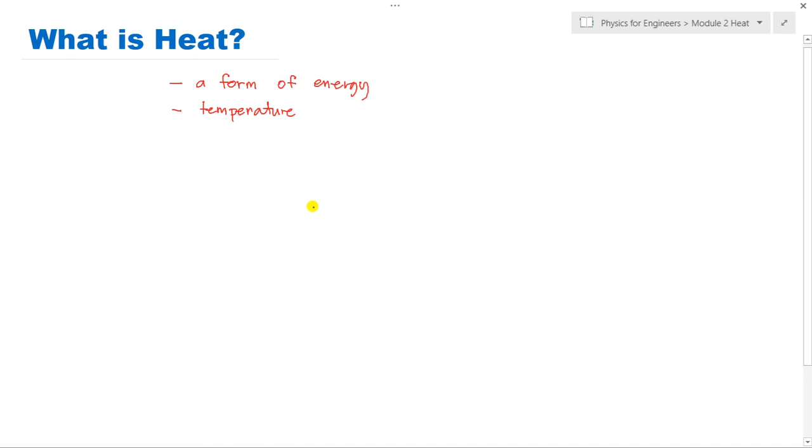And again, the common example of the transformation of heat is our steam engine. So let's say we have here a steam power plant. So this is a concept that is applicable in our field. So let's say this is our boiler. So this is a pressure vessel, pressure device, and then the boiler is filled with water. So water, H2O, and then we heat this water. So we have here a fire or a source of heat.

Okay, we heat this, and of course the chemical energy, since we are burning something. Let's say we have here a diesel fuel, wood or bagasse. So we have here a chemical energy possessed by the burning fuel, then converted into heat, and then this heat will transfer. So the transfer is here, transfer to our water. So that's why our water here will be heated up until it will change into steam.

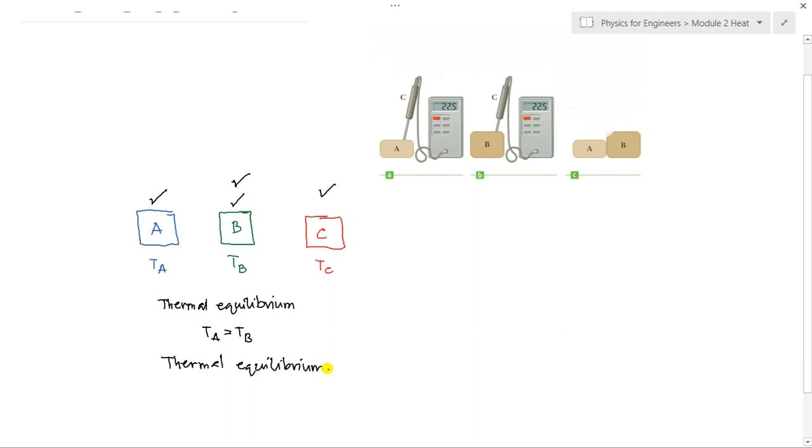And another thing, if material B and material C come into contact and achieve thermal equilibrium, meaning their temperatures approach a certain value, meaning their temperatures are equal, then we can also say that TB, the temperature of B, is also equal to the temperature of C.

Now from these two equations, temperature of A equals temperature of B, and if the temperature of B is also the same as material C, therefore by the zeroth law we can also say that A is also in thermal equilibrium with C, TA equals TC, because mathematically we can prove that TA is also equal to TC, and we can apply this in our thermometer.

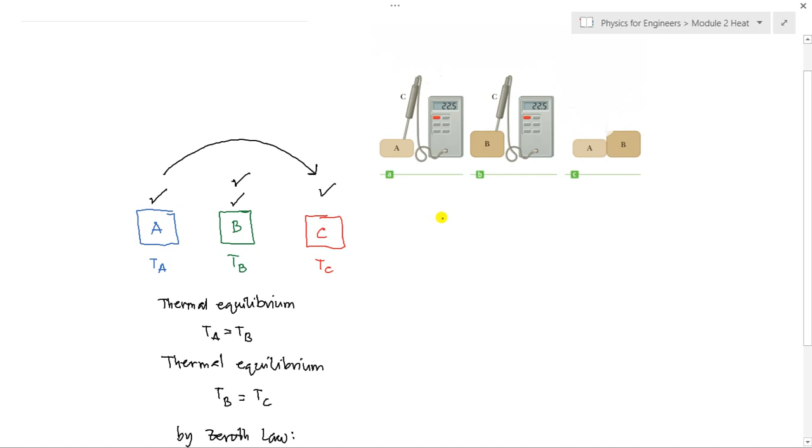So let's say it measured A, and the temperature reading of A is 22.5. So you can see we have a thermometer and material A, and the reading of material A is 22.5. The tip of the thermometer and the surface of material A have the same temperature, so it can be read; that is called thermal equilibrium.

Then the same thermometer measured a different material, material B, and it was found that the reading of material B is the same as material A, 22.5. Since they're using the same thermometer, we can say that A is also in thermal equilibrium with B, and the same with the probe of the thermometer, since they have the same reading.

So that's the zeroth law. If the temperature of A is equal to B, and B is equal to C, therefore A is also equal to the temperature of C, and the other way around. This is the definition of the zeroth law, and we can apply this by deriving the basic temperature scales. Okay, next, I'm going to jump to the temperature scale.

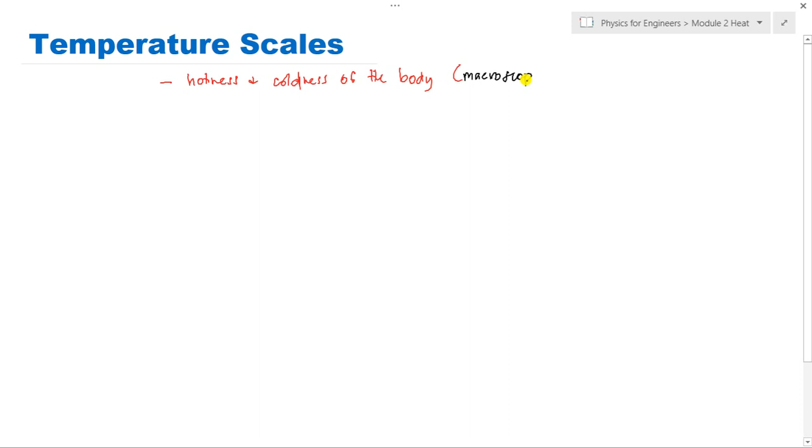We can also define temperature at a microscopic level, because another definition of temperature is the average kinetic energy of the molecules inside the body. Of course, because they interact, especially if there is input energy.

So let's say you strike it; consider these as molecules in a solid material with this arrangement. If we excite this one by striking it with an applied force, each molecule here will vibrate, and of course they will bombard each other, producing energy.

Because they rub against each other, there is friction and collision. So the totality of this creates heat, and then its average kinetic energy is measured in terms of its temperature.

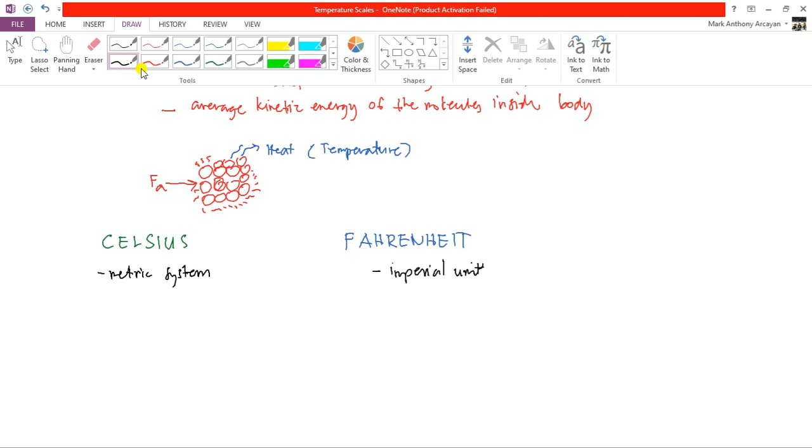And then for Fahrenheit we also have an equivalent scale, which is the Rankine. Okay, Rankine. So for Celsius we have Kelvin, and for Fahrenheit we have Rankine. So let's start with deriving the relationship that exists between Celsius and Fahrenheit.

For Celsius and Fahrenheit, we are going to base our derivation on the working substance, which is water, using the properties of water in terms of its temperature. We all know that at freezing, the temperature of water is 0 degrees Celsius, and in Fahrenheit it is 32 degrees Fahrenheit. So that's the condition at freezing.

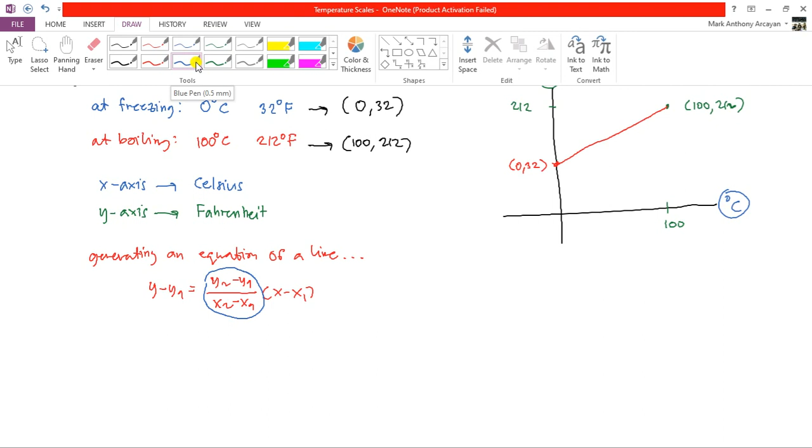So here, this one right here, can you notice, this is our slope, right? Diba? The slope is change in y over change in x. So here we can substitute the values. So y minus, let's say I'm going to pick this 0 and 32. So y sub 1 here is 32. So here we have 32, that is equal to, let's say our y sub 2 is the second point, this 100 and 212. So therefore y sub 2 is 212. This is for Fahrenheit.

Minus y sub 1 is 32, all over x sub 2 is 100 degrees Celsius minus 0, then multiplied by x minus, since we are choosing the first point as 0 and 32, so therefore the x here is 0. So 0 na siya. So simplifying, let's just change these x and y in terms of degrees Celsius and Fahrenheit. So y is for Fahrenheit, diba? Degree Fahrenheit minus 32 is equal to 180 over 100 multiplied by degrees Celsius.

So we can transpose this on the other side, so we now have degree Fahrenheit is equal to, this would be simplified into 18 over 10, that is 9 over 5 degrees Celsius plus 32. Okay, so this would be the relationship that exists between degree Celsius and Fahrenheit. Now if you're going to convert a certain temperature from degree Celsius to degree Fahrenheit, you can use this one, and of course you can also use this vice versa.

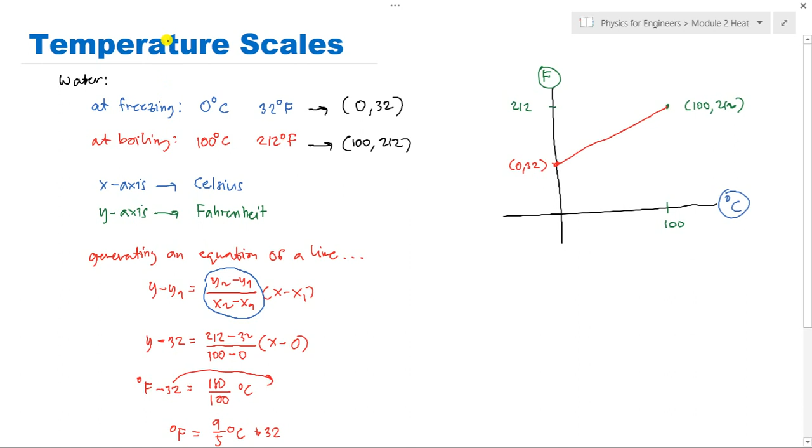Okay, and then modifying this equation, you can have degrees Celsius as a function of degree Fahrenheit. So common lang bahala sa pag-derive. So this is the relationship between degree Fahrenheit and degree Celsius. And now ato na po i-discuss ang relationship between katong ilang corresponding nga mga temperature scales. For degrees Celsius we have Kelvin, and for degrees Fahrenheit we have degree Rankine. So let's start with

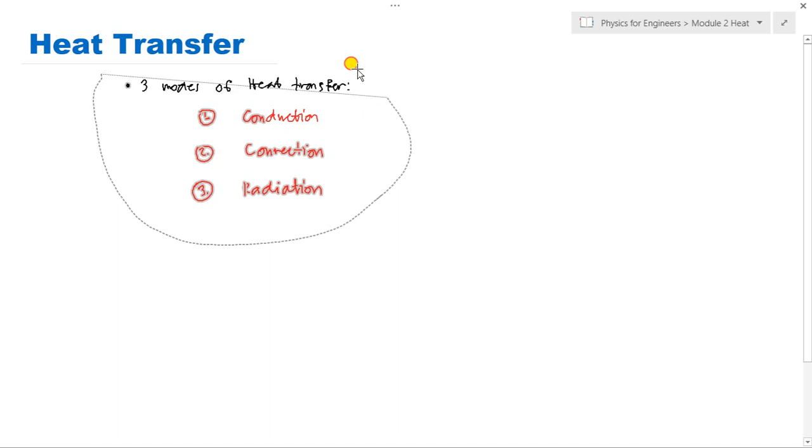So ato na siya tagsa-tagsaon, and here I am going to discuss the definition of these three modes of heat transfer, and also their formulas. Okay, importante ang mga formula because mag-solve man ta mga problems nga related ani. So let's start with conduction. Okay, mao na siya ang pinakauna, ang conduction.

Okay, so when we say conduction class, this is a heat transfer that exists among solids. Okay, this is for solid matter. Okay, solids. But however, in some cases class, we can also experience conduction heat transfer in fluids, like in liquids and gases, if given certain conditions. Let's say if the air is not moving, very still air, then we can assume that conduction is the mode of heat transfer only in that case.

But naturally, since the air around us is moving, it can no longer be called conduction. So the most common application of conduction is for solids, because conduction is the heat transfer that exists between molecules that bombard, okay, that vibrate each other.

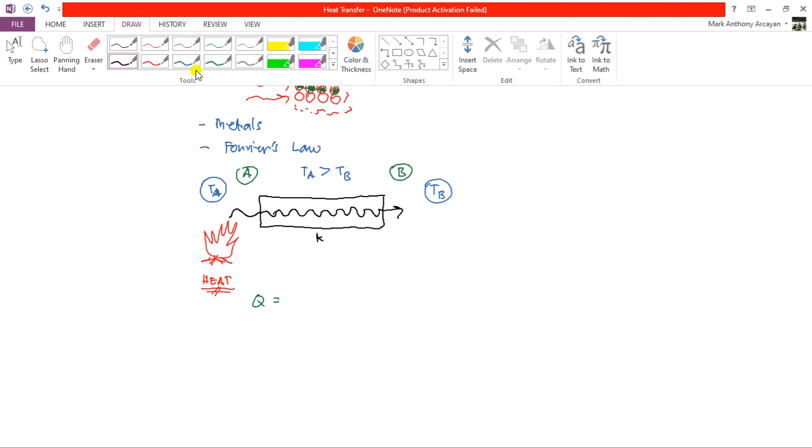Why? Because normally heat moves from higher temperature to lower temperature, so that's why there's a negative sign. Anyway, if the problem is just asking for the heat rate, you can just take the absolute value. So for Fourier's law, we have negative K.

Again, K is the thermal conductivity, and the rate of heat transfer is also proportional to the exposed area. The exposed area here is this side - can you see? This side has more exposed area. So we have area, and of course the last factor is that the rate of heat transfer is also related

to the length of the material. Of course, since this is conduction, it happens molecule to molecule. So the farther you are, the longer it takes to conduct.

As I gave you an example earlier about the bonfire, when you dip a steel rod into the bonfire - if the rod is long, it takes longer to feel the heat, whereas if it's short, it heats up faster. So there's a relationship that exists between the rate of heat transfer and the length.

So according to Fourier, the relationship is directly proportional to the thermal conductivity and the area, but inversely proportional to the length. So it's faster if the length is short - if the length is longer, it means it's slower.

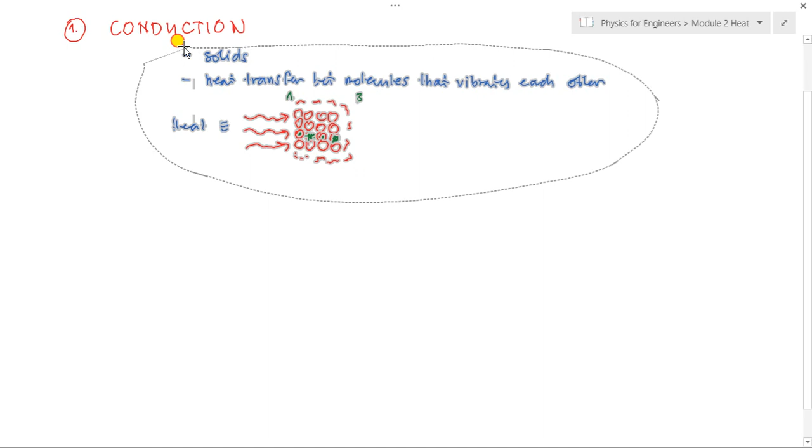Okay, so we also have some formulas we need to take regarding conduction. What if we can model our heat transfer into an electrical circuit?

As you notice, by Ohm's law, we know that the relationship is voltage V is equals to IR. So this is voltage, the driving force, and of course this is the current, the flow of charge, and we have here the resistance, which resists the flow of current. So the current is inversely proportional with the resistance. That's for Ohm's law.

But for Fourier's law, our law of conduction, we go back. So Fourier's law, we have Q is equals to negative KA over L delta T. Now, as you notice, the I from Ohm's law is the current, the flow of electrons or electrical charge. For Fourier's law on conduction, what flows? We can relate that current is the same as in Fourier's law, that is the heat rate, or the heat transfer rate.

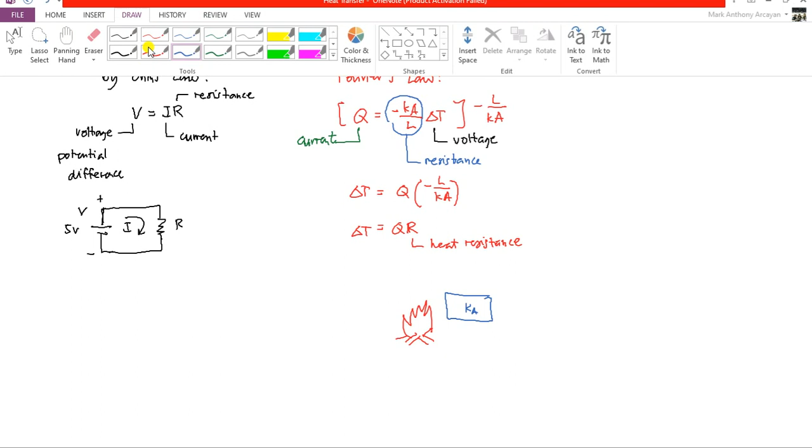And then we have some materials close to it. Let's say we have the first one, material A with thermal conductivity KA, and then next to material A, another material, material B, with thermal conductivity KB. And then we have a last material with conductivity KC.

We have here a composite material, and we assign temperatures. So we have T1 for this side, and T2 for this side. Assuming that T1 is greater than T2, so this side is hotter. We also have here an area, the heat transfer area, and since they are uniform, they have the same area but they have different lengths. Let's say this is length A, length B, and length C.

So they have different lengths, different thermal conductivity, but they are of the same area. Heat flows from the first material, from K A to K B and then to K C.

And then it goes out. So we will find the heat transfer rate from this side T1 until this side T2. Of course, the principle here can be applied from electrical circuits, those series or parallel circuits.

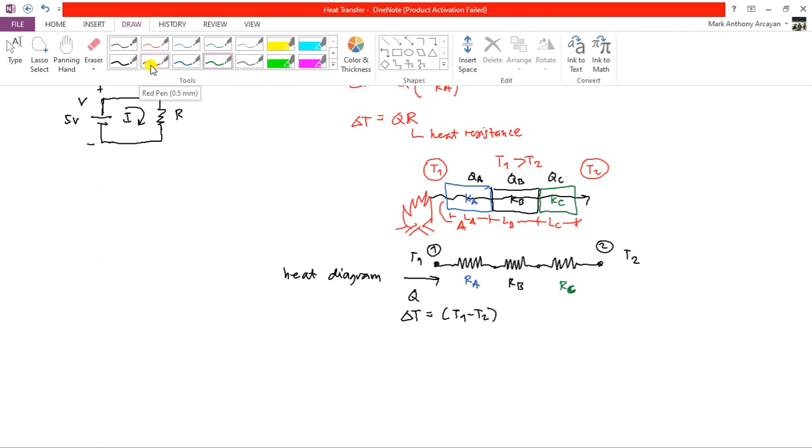How about for R? Since they are of different material, the first one is RA, the heat resistance for A, then RB, the heat resistance for B, and the last one is the heat resistance for C. So since this is series, we can generate the equation for current Q. We all know that current I equals V over R.

So what is the voltage again in our heat transfer area? That is the delta T, the temperature gradient. So we have voltage delta T all over the resistance. Since this is series, the total resistance is equal to R1 plus R2 plus R3.

Summing it up, that is RA plus RB plus RC. And as we all know, the formula for resistance is negative L over KA.

Since this one right here is negative, we can just ignore this, it stays the same, or just take the absolute value anyway, since nothing changes because it's unidirectional. So we now have negative, or we can keep the negative and just put it in the numerator.

So for RA we have the length LA over K A and then the area, plus for RB the heat resistance is the length of B over the thermal conductivity of B, then A, plus the length of C over the thermal conductivity of C and then the area. So this would be the rate of heat transfer for composite materials.

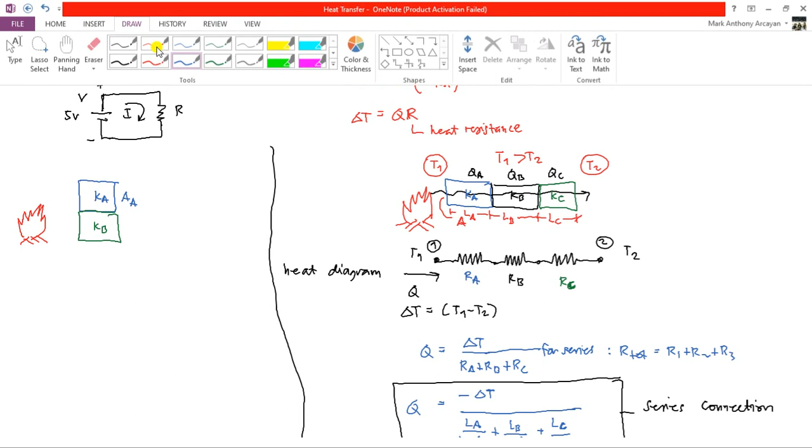How about for parallel? Let's say we have again a heat source, and then I have here the first material, and then the second material. Of course the first one is K A, and the other is K B. K A has an area, this is area A, and K B has a different area, that is area B. And let's say they have the same length.

And then of course on the left side there is temperature 1, hotter than the other side, temperature 2. So therefore heat will flow from here to there. And since the heat flows two ways from the heat source, it will be split. It splits since they're in parallel. So the heat from the source is divided, going to material A, and the other going to material B, then they join again. So therefore a parallel connection exists.

So if we're going to convert this into a heat diagram, it will now become: this first point is T1, and then it splits, so this is the resistance for material A, and another one is the resistance for material B, and then they come up with the same temperature. So this is T2. So here we have the resistances. This one is for material A, that is resistance A, and this one below is resistance B.

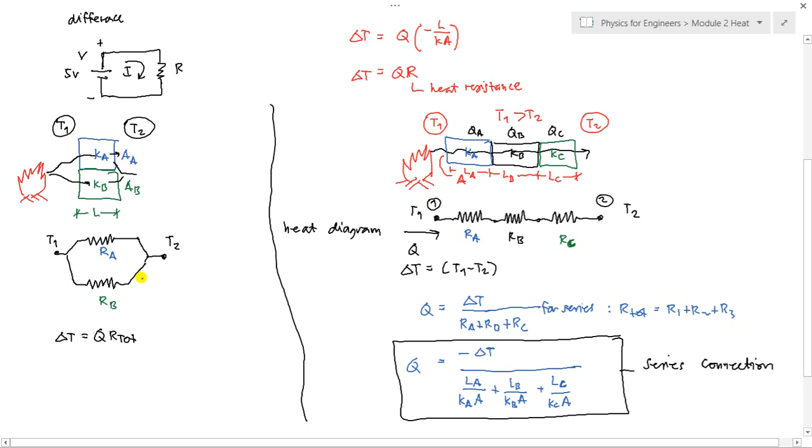So here we can use Ohm's law for heat. Our voltage is the temperature, so that is delta T. Voltage equals IR, where our current here is Q, and our resistance is the R total, in parallel. Since it's in parallel, what is the total resistance for a parallel connection? For a parallel connection, R total is equal to RA times RB all over RA plus RB.

Actually this is derived from the relationship 1 over R total equals 1 over RA plus 1 over RB. So here it's in parallel, so we're going to solve for Q. Therefore Q is equal to delta T all over R total, where delta T is T1 minus T2, all over RA RB all over RA plus RB.

Now substituting the parameters of materials A and B. For material A, the resistance formula is L over kA times area A, since the L is the same, multiplied by RB, that is L over kB area B, all over L over kA area A plus L over kB area B. Actually, we can cancel one of the L's here, so the final formula would be T1 minus T2 all over this one.

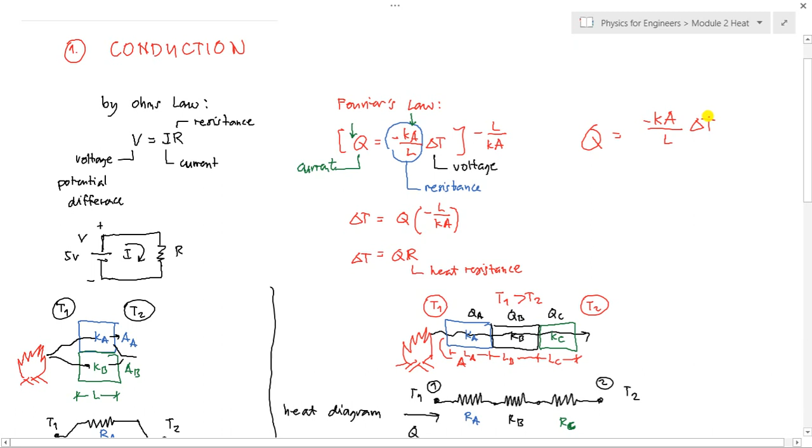So again, Q is equals to negative kA over L, so the length of the path of conduction, then change in temperature. Again, para maka-solve ta og problems nga composed of two or more materials arranged in certain arrangement, let's say parallel or series, then mao na siya ang mga formulas niya pag-derive niya. So dapat kabalo mo

interpret sa heat diagram. So ang pag-relate nimo ana is mura siya sa concept sa electrical circuits. So gamit ang Ohm's law, we're going to relate the voltage as the temperature difference, the current as the heat rate, and the resistance, which is the ratio of the length of the conductor and its thermal conductivity and the area. So this is for conduction. Now let's go to convection.

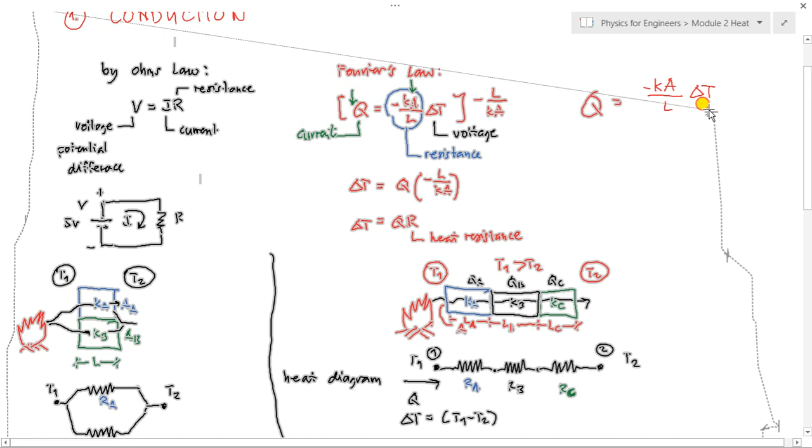So take note with this. So the second one is convection. Now for convection class, this is the transfer of heat mostly for fluids. So what are fluids? These are liquids and gases. So sa tubig o sa hangin, liquids and gases.

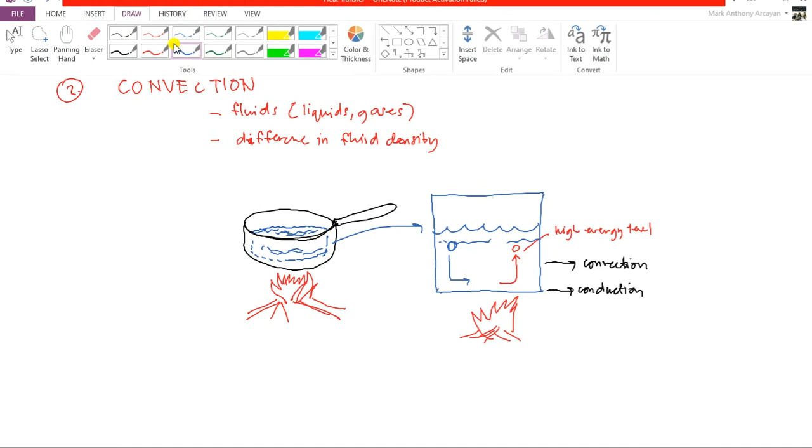Why? Because kani siyang high energy level nga mga molecules, this one is already less dense. Mas gaan siya. But this low energy level nga mga molecules, more dense ni siya, or mas denser ni siya. So therefore naay difference in fluid density, and by this mechanism, nagrotate siya. Nagrotate ang colder water kay mo sink, ang hotter water goes upward.

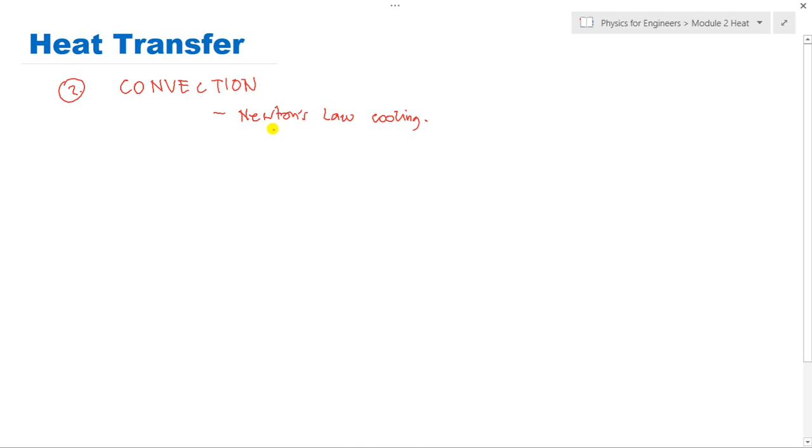So for convection, it follows Newton's law of cooling. So Newton's law ni siya. Ganiha, for conduction it follows Fourier's law. So for convection, Newton's law. Unsa na ang formula ani? So di ba, if we have here Newton's law of cooling, if we have here some water, so naay air nga gi-pass through.

Actually ang cooling effect niya according to Newton's law is we have here Q is equal to the convective heat transfer coefficient, HC, then the area. Okay? Directly proportional siya sa area. So kung mas dako ang surface sa tubig, dali gid ni siya ma-cool. Pero gamay ra gali. Okay? So that is Q equals HC A delta T.

That is kung saan pasot aning delta T. So at the surface of the water, kay surface phenomena na siya, that is T1, and then of course the environment T2. Now in analyzing convection class, be sure to indicate ang sa surface gid because this is a surface phenomena and convection. Say pasabot niya ni sir.

Let's say if we have here a wall, okay? We have here a wall and this is the surroundings. Of course, ang una mahitabuan ni heat transfer within the wall, this is conduction. However, at the point nga ang surface temperature sa wall, this is T1 and the temperature at the surrounding T2. Okay? Ang mahitabo nga heat transfer from the surface of the wall to the surrounding, exposed in the surrounding, is already convection.

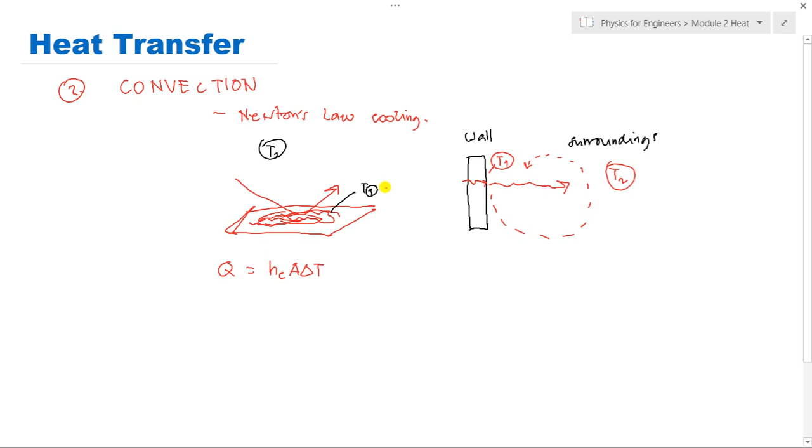So again, walay mahitabo nga convection sulod sa wall because purely conduction na siya since this is solid. But in this case, since outside sa wall kay fluid naman siya, so therefore convection na siya. So again, take note that the delta T here is the temperature of the outside condition, that is surrounding, and then the surface temperature of a certain material nga subject sa atong analysis.

So here we can also use for composite fluids. Okay? For composite fluids, let's say ang fluid nga gi-stack in series or in parallel. So let's say fluids at different densities. Fluid A, fluid B, fluid C. Of course, naa na siya'y corresponding HC: heat transfer coefficient for A, for B, for C. Actually, the same as what we did. Let's say this is T1 and then T2. Let's say nag-init ta. Ato siya heat up. Of course, magbukal-bukal ni siya.

So ang overall convective heat transfer ani, medyo complicated man ning heat convection, mao nang gi-HC lang siya. Unlike conduction na ang resistance niya in terms of the length and the thermal conductivity, here inversely ra siya proportional to the heat transfer coefficient. So that's why you can still use the principle for electrical circuit. This is T1 then T2, but this time this is RA, the resistance for fluid A, the resistance for fluid B, and the resistance for fluid C.

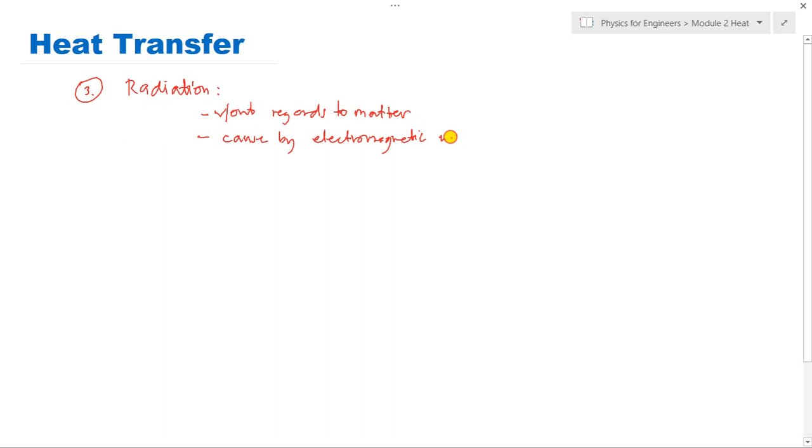So the last one is the radiation. This is the transfer of heat energy that does not depend on matter, without regards to matter, meaning bisag wala pa'y hangin. Ang manifestation sa radiation is due to electromagnetic waves. Of course, kaning electromagnetic waves nag-carry ni siya og electromagnetic energy.

Let's say, ang good example is ang atong sun. Atong sun, and then layo kaayo ang earth. How come nga ang energy gikan sa sun maka-reach sa earth? In fact, ang medium nga nag-exist between the earth and the sun is a perfect vacuum. This is space. Walay hangin, wala po'y conduction tungod kay walay rod nga nag-connect sa sun ug sa earth. So walay matter. That's why radiation takes place.

So for radiation, these are electromagnetic waves. Since this is a source of heat, the sun is composed of hydrogen and helium. Kana nga mga elements, mag-emit na siya og electromagnetic waves every second.

So the sun radiates heat towards the earth, and we feel the heat. And of course, since this is heat transfer by radiation, there must be a temperature difference. Whether it's radiation, convection, or conduction, if there's no temperature difference, there's no heat transfer. That's why the sun is hotter than the earth, so the flow of radiation is from the sun towards the earth. So radiation is caused by electromagnetic waves moving from a hotter body to a colder body.

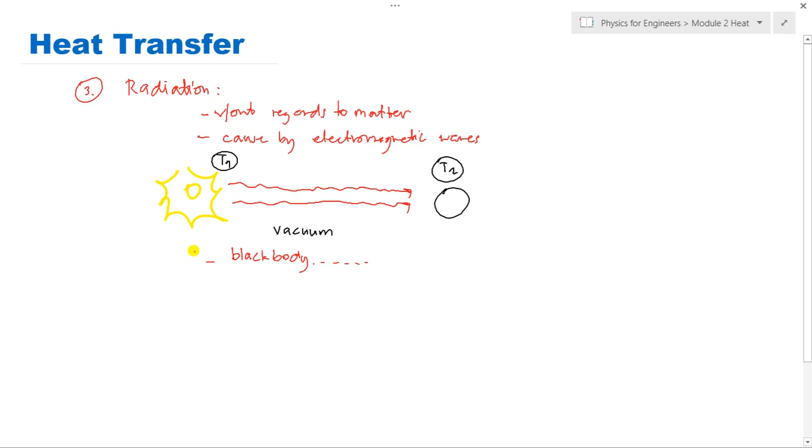And also in radiation class, there are principles that apply. The first one is the black body. Not only does the sun radiate energy, all bodies do. As long as an object's temperature is not 0 Kelvin, all objects in our surroundings above absolute zero radiate. So every second, all of us emit radiant energy.

Let's say we have an object A, another object B, and another object C, all inside a room. Object A emits radiation, object B also emits radiation, and object C also emits. Of course they don't just emit, A also accepts radiation. So A accepts radiant energy coming from outside sources, and same with C. That's why energy is conserved here, some goes out from them, some comes into them. So they interact with each other.

For a black body, if a material absorbs 100% or emits 100% of radiant energy, it's considered a black body. Of course, in reality nothing can reach being a true black body since it's more of an ideal concept, so we only have near black bodies. Let's say its emissivity - we call this parameter emissivity in a black body - we denote that as E. The emissivity for objects around us is about 0.9 or 0.95.

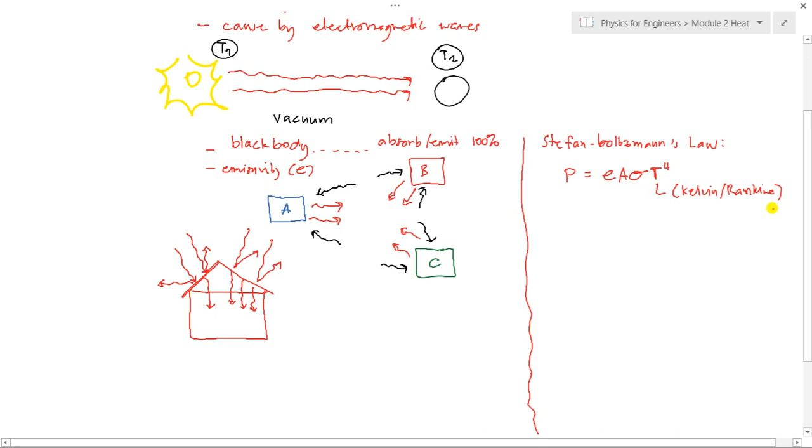For Stefan-Boltzmann's law, the amount of energy being emitted by a certain object is equal to P, where P equals the emissivity E, times the area - the more area, the more it emits - times the Stefan-Boltzmann constant, denoted sigma, times T raised to the power of 4. The temperature for Stefan-Boltzmann's law must be in absolute terms, meaning either Kelvin or Rankine. Take note, if it's in Celsius or Fahrenheit, that would be wrong.

Now, in order to determine the net rate of heat transfer, since we're dealing with heat transfer, let's consider two objects or two entities. Let's say we have object A and its surroundings, which I'll label as entity B. Of course, A radiates heat.

Of course, the surroundings B also radiate to A, and B follows the same formula, EA sigma T to the 4th. So surface A has a temperature TA, and the surroundings B also has a temperature TB. If A is hotter than its surroundings, then heat transfer happens.

The net rate of heat transfer is represented by Q, which is equal to the difference of the amount of energy emitted by each object, that is emissivity times area times sigma times T to the 4th. For A, that is E, area of A, sigma, TA to the 4th minus E. Since this is a surface phenomenon, the sigma is the same for all materials, then T to the 4th with letter B. So simplifying, we have EA sigma times TA to the 4th minus TB to the 4th.

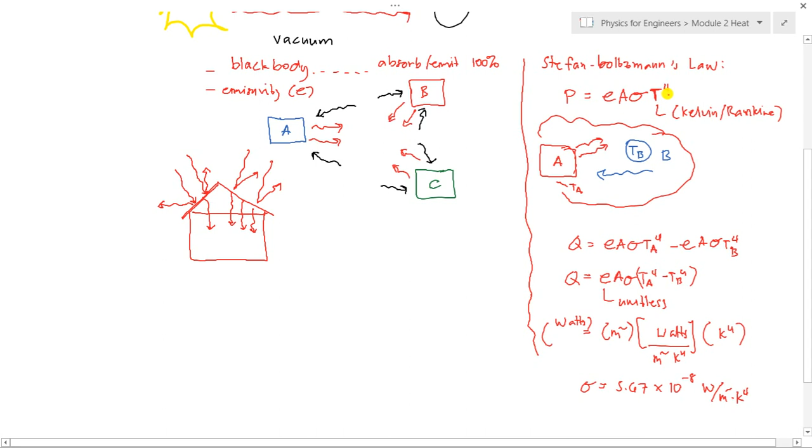What is the value of the Stefan-Boltzmann constant? Actually it's in the calculator, but you can memorize that it is 5.67 times 10 raised to the power of negative 8 watts per meter squared Kelvin to the fourth. That's the formula for radiation, which is emissivity times the area times the Stefan-Boltzmann constant sigma, then to the fourth power of its temperature. This equation comes from the Stefan-Boltzmann's law.

So just a review, again for conduction, it comes from Fourier's law. Convection comes from Newton's law of Cooling, Q is equal to hc times A times delta T. And radiation is Stefan-Boltzmann's law, P is equal to, actually this is EA sigma T to the fourth. That's the formula for heat transfer.

So let's try some sample problems. This is a problem for conduction. It states that an owner of a house designed one of its walls 2 meters high and 2.45 meters long with 3 layers comprising of 0.2 meter concrete. First is concrete, followed by 0.5 inch sheeting, which has a lot of insulation, then 3.5 inch fiberglass batting and 0.5 inch drywall.

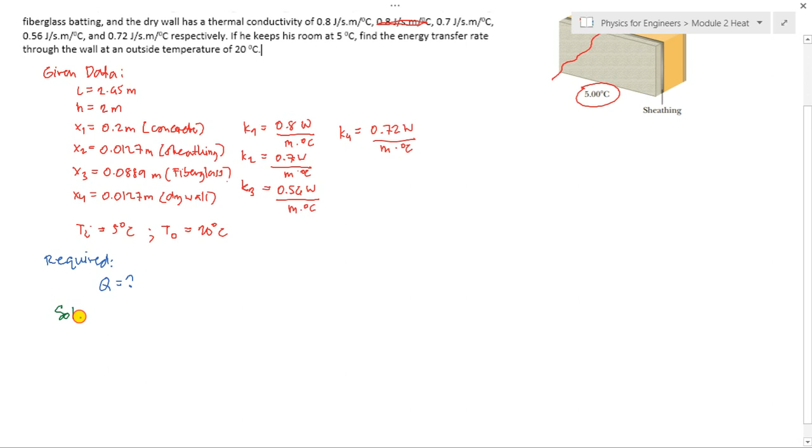Solution. Now this is conduction for composite materials, so we're going to draw first its equivalent heat diagram.

So from the inside, that is Ti, then there's a resistance. This is for the concrete, that is R1, because 1 represents concrete, followed by the sheeting, that is the resistance for sheeting. Next is the resistance for fiberglass. The last one is the resistance for drywall, R4. Then finally to the outside, that is To.

So here we can say that the total resistance, R total, is equal to R1 plus R2 plus R3 plus R4. And we know that in terms of the given data, that is equal to x all over k times the area. So solution,

from the heat diagram we can say that Q is equal to, since this is like current, delta T over R, that is delta T all over R total. And we know the delta T, so let's start with Ti.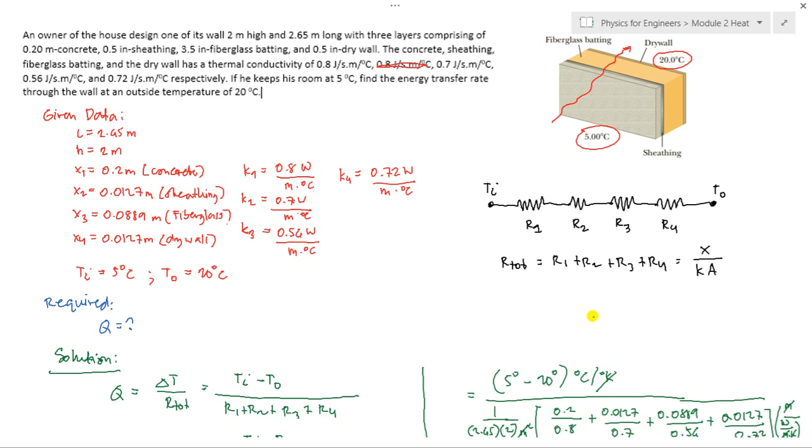Why? Because of course if you see, the higher temperature, normally heat flows from higher temperature to low temperature. That's why Fourier put a negative on K in the general formula. That's why let's just take the absolute here. That is 178.84 watts, to the inside. Okay, so this is our final answer.

Let's proceed for convection. So here, a room is to be maintained at 20 degrees Celsius during the winter season with outside condition of 1 degree Celsius. The convection heat transfer coefficients in the inside and outside are 0.5 watts per meter squared degree Celsius and 0.87 watts per meter squared degree Celsius. The total surface area of the walls of the room is 100 square meters, and its thickness and thermal conductivity are 0.7 meters and 0.8 watts per meter per degree respectively. Find the heat rate transfer from the room towards the outside environment.

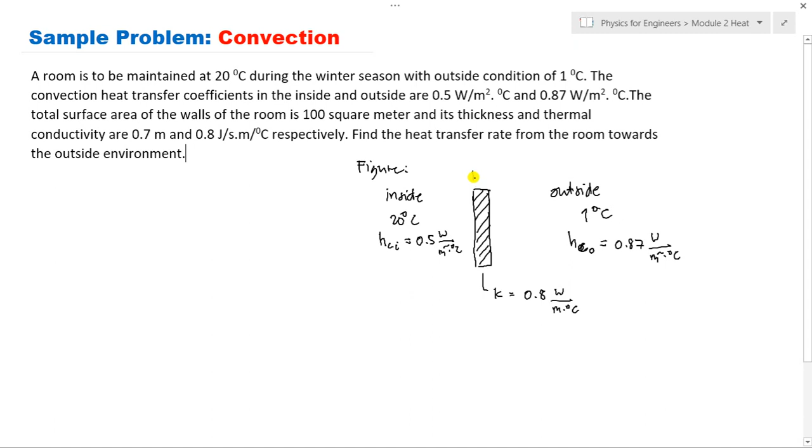Let's say HCI, that is for the inside, is 0.5 watts per meter squared degree Celsius. And then HCO is equal to 0.87 watts per meter squared degree Celsius. So those are the heat transfer coefficients. And of course, we also have K here, thermal conductivity, that is 0.8 watts per meter degree Celsius. And this is the thickness, 0.7 meters, the thickness of the wall.

And of course, it has a total area of 100 square meters. So basically, since the inside is much hotter than the outside, the direction of heat transfer is from the inside towards the outside. And we're going to solve for this Q. So here we can have first the heat diagram. This is a combination of convection and conduction.

Why? Because from the inside, Ti, convection happens first before conduction. So therefore, we have here the resistance for convection at the inside, Ri. Next, conduction in the wall, that is Rw, resistance of the wall. And lastly, the convection heat transfer at the outside, Ro, before reaching To. So here, we have a total resistance equal to Ri plus Rw plus Ro. Okay, so we take the resistance formulas, which were actually derived. If you already know the principle, then it will be easier for you.

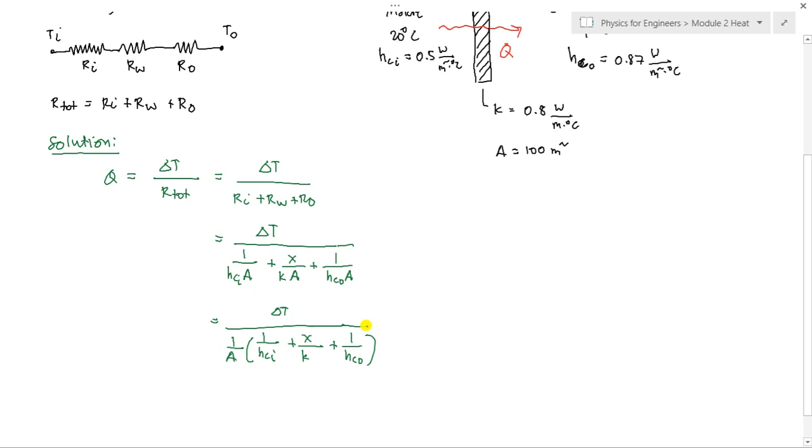So, substitute the values. Delta T, that is 20 minus 1, so 19 degrees Celsius or Kelvin. Then 1 over the area, 100 square meters. Then 1 over HCI is 0.5, plus X of 0.7 over 0.8, plus 1 over the heat transfer coefficient in the outside, 0.87. And the unit is meter squared degree Celsius over watts. Therefore these cancel, and what's left is just the watt.

So therefore Q is equal to, simplifying, 19 over 1 over 100 times 1 over 0.5 plus 0.7 over 0.8 plus 1 over 0.87.

So the answer is 472.12. So 472.12 watts. So that is the heat transfer from the inside towards the outside. So that's it, class. Then let's proceed to the

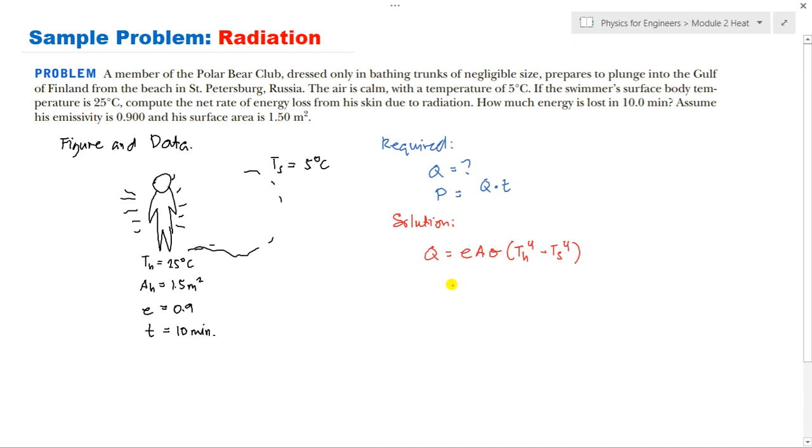So solution: for radiation, Q is equal to emissivity, the area, Stefan Boltzmann constant, and then the difference, TH to the fourth minus the surroundings to the fourth. It should be in Kelvin. Don't forget. Emissivity is 0.9. The area is 1.5 meters squared. The Stefan Boltzmann constant is 5.67 times 10 to the power negative 8 watts per meter squared Kelvin to the fourth.

Then multiplied by TH, converted into Kelvin. That is 25 plus 273 raised to the power of 4 minus 5 plus 273 raised to the power of 4, in Kelvin to the fourth. Therefore, these cancel. The meter squared cancels. What's left is watts. So Q is equal to, simplifying, 0.9 times 1.5 multiplied by 5.67 times 10 to the power of negative 8, then multiplied by 25 plus 273 to the fourth minus 5 plus 273 to the fourth. The answer is 162.83.

Watts. That is what he lost, because he radiates, since he is warmer. And how much energy did he lose in 10 minutes? That would be P. Okay, this is our first answer for the heat rate. Then the second one is the energy. So P is equal to Q times time.

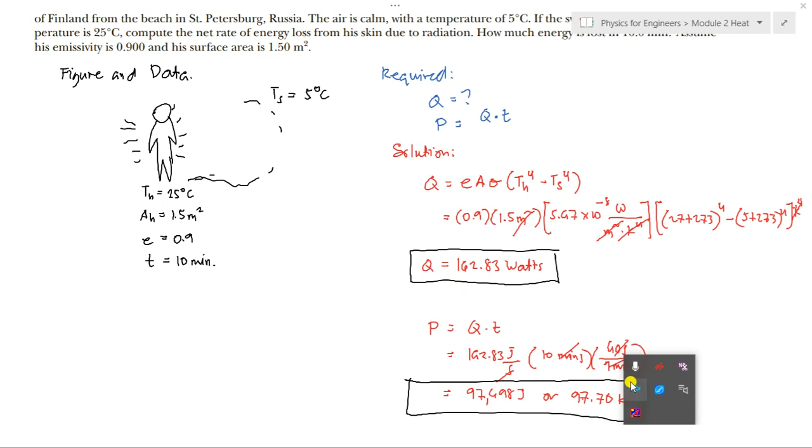So, let's proceed to the kinetic theory of gases. Okay, class, let's continue our discussion. We are now on the principles of kinetic theory of gases. These are the important key points. Gases consist of particles in constant motion, meaning no acceleration, so uniform motion. Then it is mostly assumed to be empty space; only gas molecules are present, and it exerts pressure when colliding with the walls of the container. Let's say we have a sample container, and here some representation of our gas molecules.

So in this theory, you assume nga inside the container, mostly empty spaces. So wala na lang present aside from the gas molecules. And then these gas molecules, of course, they are in motion, so constant motion, no acceleration.

And then it collides to the wall and it exerts pressure, so meaning na siya force exert, then mo balik na pod mo bombard siya. So that's why we can feel this one. So that's why we have a total pressure. So mao nang sa balloon. Okay, if we have a balloon, so if nag-collide ang mga molecules, that's why mo dako ang balloon kay naa'y pressure gi-exert, sige na sila bombard with each other at a constant motion.

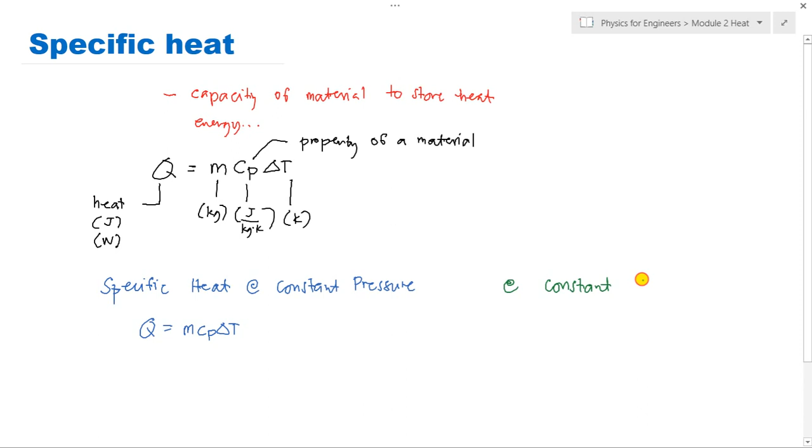And we also have the other type, which is at constant volume. So these are materials that will not vary if naa'y process nila, either dukdukon sila, ang heat niya di kaayo mo change, at a certain temperature range. So for that type, Q is equals to m Cv delta T. So this is the specific heat at constant volume.

So this is more applicable for solid objects. Why? Because if you're going to add energy on a solid, diba dugay na mo change ang volume. So constant volume sila. Whereas the constant pressure, this can be applied to fluids.

Okay, fluids na siya kay especially for water, mag-change man ang tubig. Okay, fluids. And even gases. Okay, change man yung volume. But of course, ang fluids na po na siya corresponding Cv. Okay, every material na gina siya yung corresponding specific heat at constant pressure and specific heat at constant volume.

Now, for the specific heat, natay daw ka-importante ng mga working substance. And let's start with the air. So the air has two specific heats. We have specific heat at constant pressure, that is Cp. Cp of air is 1.0062 kilojoules per kilogram degree Celsius or degree Kelvin.

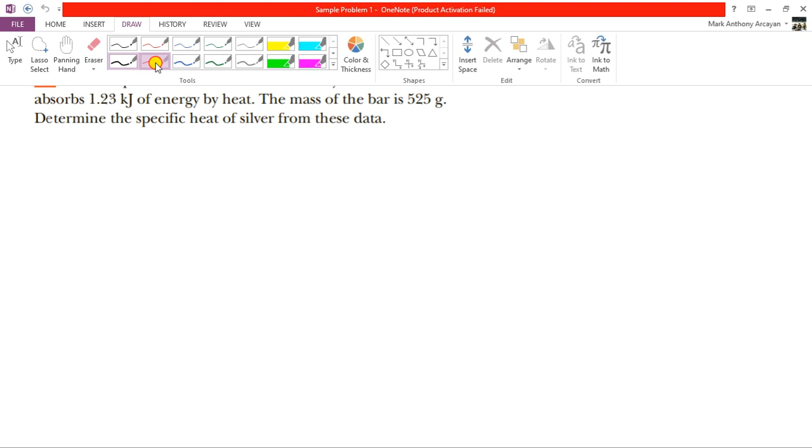So take note mga constants. These are important constants nga magamit nato, especially if we're solving kanang thermodynamics nga problems. So in specific heat, we have two, at constant pressure and at constant volume. So let's have here an example problem. Let's say the temperature of a silver bar rises by 10 degrees Celsius when it absorbs 1.23 kilojoules of energy by heat. The mass of the bar is 525 grams. Determine the specific heat of silver from this data.

So again, we're going to write first the figure and data. So let's say this is a silver bar, and then its temperature rises, meaning the change in temperature, delta T, is equal to 10 degrees Celsius. When it absorbs, meaning the heat is being inputted to the silver bar. So gisod, gipasok. So ang direction sa heat, either pasod or pagawas. I mean, not a vector quantity pala, direction lang kung pasod ba siya or pagawas.

So here we have Q input sa silver, that is 1.23 kilojoules. Then the mass of the silver bar M is equal to 525 grams, or in terms of kilogram, that is 0.525 kilogram. So here determine the specific heat. We are required to solve for the specific heat C of the silver. So silver is Ag. So specific heat sa silver. So solution.

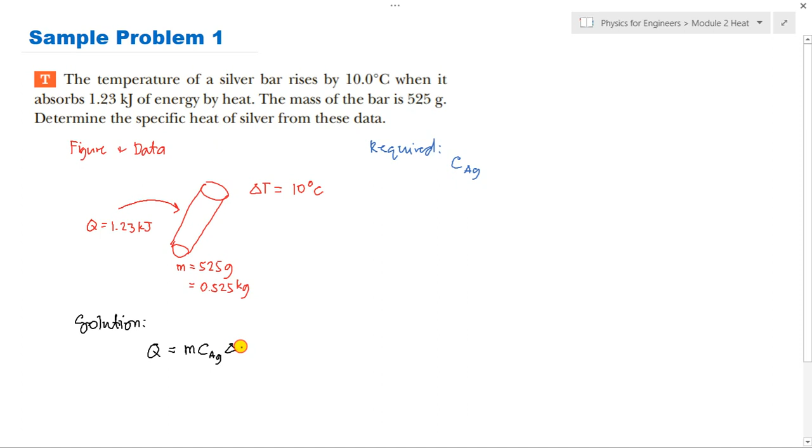So by the general formula of the heat energy, heat Q is equal to mass of the material times C sa material, here we are dealing with silver bar, times change in temperature. Since we're obtaining C of Ag, divide both sides by M delta T. So this will be cancelled out. So we now have specific heat sa silver is equal to Q over M delta T. So Q here is 1.23.

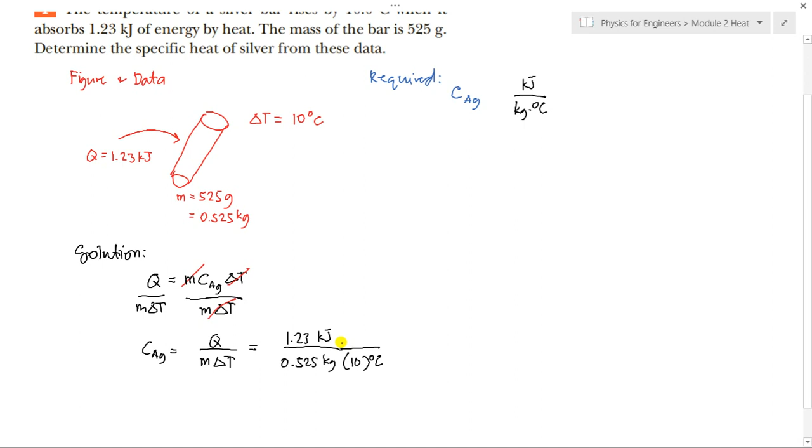Actually, ang ato answer ani is in kilojoules per kilogram degree Celsius. So 1.23 kilojoules divided by 0.525 kilogram multiplied by change in temperature 10 degrees Celsius. So simplify, 1.23 divided by 0.525 times 10. So the answer is 0.234 kilojoules per kilogram degree Celsius. This would be the specific heat of our silver bar given this data.

Okay, let's proceed to the next. So we have here a 5-gram lead nga bullet traveling at 3 times 10 to the power of 2 meters per second, or 300 meters per second, stopped by a large tree. If half the kinetic energy of the bullet is transformed into internal energy and remains with the bullet while the other half is transmitted to the tree, what is the increase in temperature of the bullet? So we have here figure and data.

So the bullet travels at a speed of 300 meter per second. Okay, and then the mass is 5 grams, or in kilograms is 0.005 kilogram. Okay, 0.005.

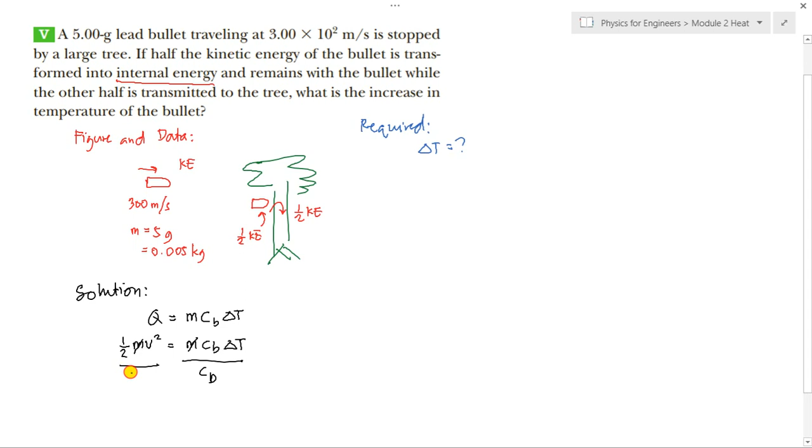So ang Q, the heat energy input sa bullet is just 1/2 of its kinetic energy. So that is 1/2 mass sa bullet and square sa velocity sa bullet is equal to m cb, meaning specific heat sa bullet, this is cb, and then delta t. So as you can see, makancel ang mass, and then divide both sides by cb, so we have change in temperature is equal to v squared all over 2cb.

And then we have here the given velocity. So ang given velocity kay 300, so 300 meter per second. So we have here 300 squared all over 2 cb. So that would be 300 squared divide by 2. So we have 45,000. That is 45,000 over cb. So this is our final answer because cb is not given.

Mao ni siya ang equation for its temperature rise. If ever natay cb, then we can just substitute this one directly. So again, 1/2 sa kinetic energy ang nangadto sa bullet.

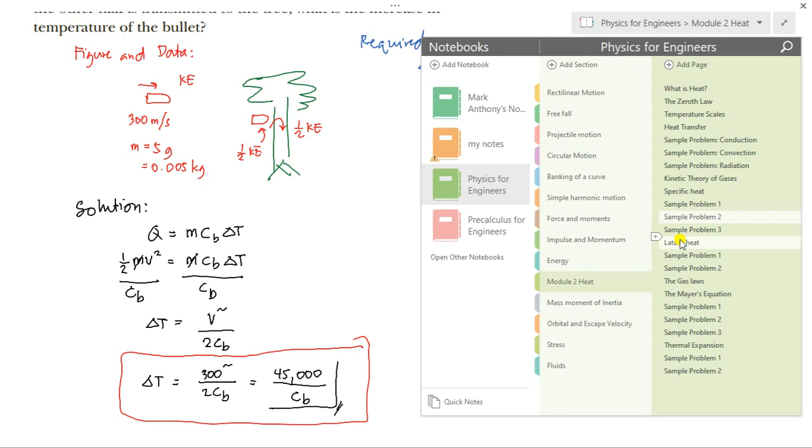Okay, so we have the last example for specific heat. So we have here a cylindrical water tank, 0.5 meter in diameter and 2 meters high, has a temperature of 24 degrees and at full capacity, meaning puno siya. Find the equilibrium temperature if a 20 kilogram aluminum ball initially at 50 degrees Celsius is dropped inside the tank, assuming that the tank doesn't overflow throughout the process. Specific heat of aluminum equals 0.29 joules per gram per degree Celsius.

So here we have figure and data. So we have here a tank. Okay, puno siya sa tubig. So iya height is 2 meters and then iya diameter is 0.5. Initially ang temperature niya is 24 degrees Celsius, and then gi-drop. So we have here another object being dropped inside. So we have here an aluminum ball. The aluminum ball has a mass of 20 kilogram and a temperature, so temperature of aluminum TAL is equals to 50 degrees Celsius, meaning mas init ni siya.

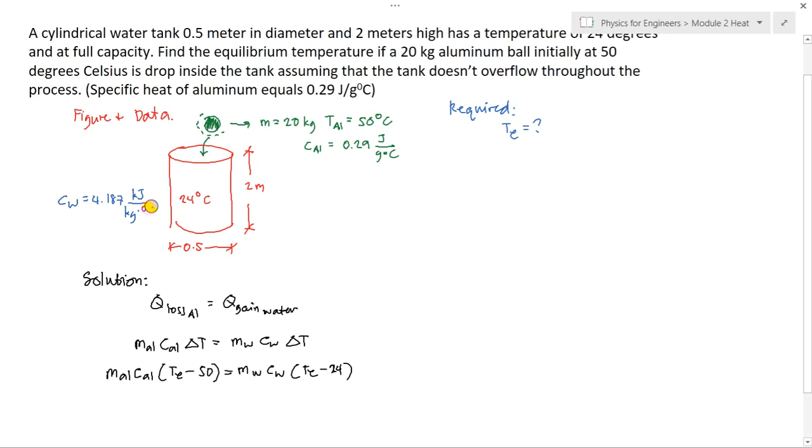Okay, we have mass of aluminum, we have also the given specific heat of aluminum. How about for water? We all know that the Cp of water equals 4.187 kilojoules per kilogram degree Celsius. And then also, how about mass of water? We don't know the mass of water, but take note, since it's based on volume, and that's automatically based on the density of water. Mass of water is just density of water times the volume of water.

Now the volume of the water is equal to the volume of this cylinder since it's at full capacity. So density of water is 1000 kilogram per cubic meter multiplied by the volume, that is pi r squared or pi d squared, that is 0.5 squared over 4. The height is 2 meters. So the answer would be in kilograms. That is 1000 multiplied by pi, then 0.5 squared over 4 times 2. So the answer is 125 pi.

125 pi kilograms. Now we're going to substitute this in our equation, solving for TE. So we now have mass of aluminum, C of aluminum, TE minus 50, and then mass of aluminum, C of aluminum equals mass of water, C of water, TE minus 24, mass of water, C of water.

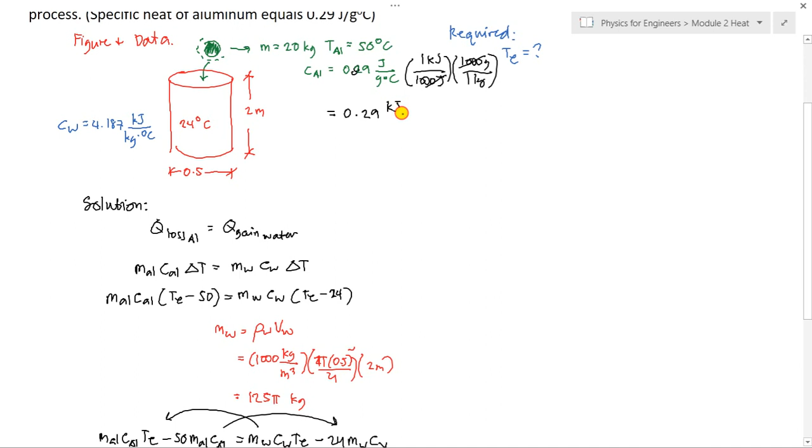So we convert this into kilojoules per kilogram, so we're consistent. We just multiply, divide by 1000 joules per 1 kilojoule, and 1000 grams per 1 kilogram. Anyway, it cancels out. So this is just equal to 0.29 kilojoules per kilogram degree Celsius.

So we just multiply. So we have here 0.29, then minus 24 plus 273. Mass of water is 125 pi. Cp of water is 4.187. The same thing, mass of aluminum 20 times 0.29 minus 125 pi multiplied by 4.187. So the equilibrium temperature is 50 plus 273, multiplied by 20 times 0.29, minus 24 plus 273

then 125 pi times 4.187, then divided by 20 times 0.29 minus 125 pi times 4.187. So the answer is 296.91.

296.91 degrees Kelvin is here. And if you want this in degrees Celsius, TE equals 296.91 minus 273. So the answer would be 23.91 degrees Celsius.